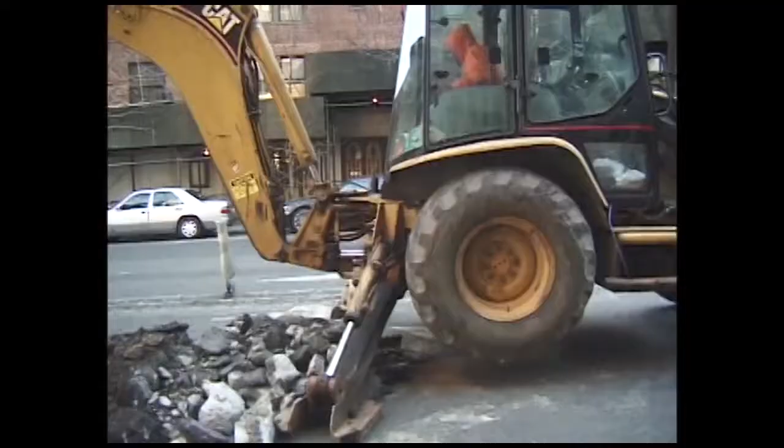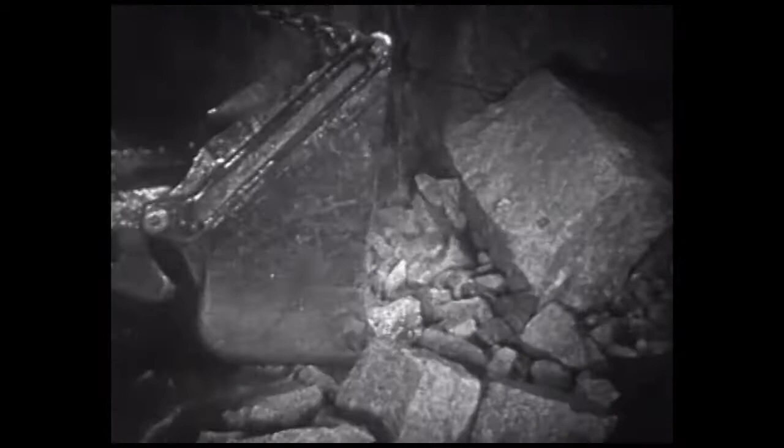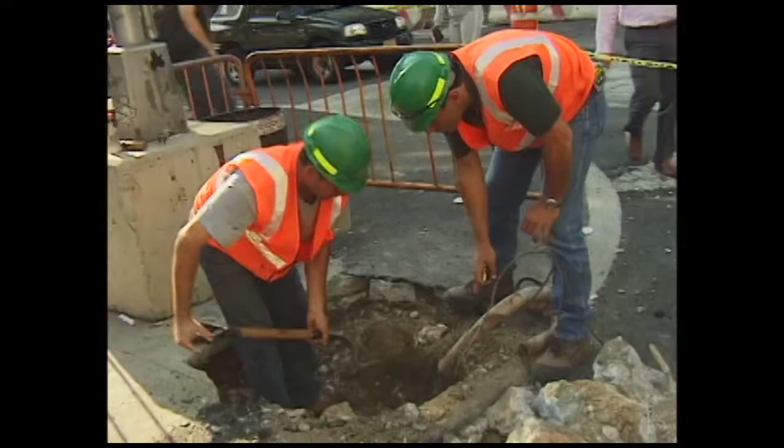And that's where the New York City Department of Design and Construction, or DDC, comes in. Ever since the first water main and sewer pipes were placed in the ground, there has been a need to maintain and fix them. Over the decades, various agencies have been installing and maintaining the city's infrastructure. In an effort to streamline the process and coordinate the work, the city took the construction arms of several agencies and placed them under one roof, so that the water main people could talk to the roadway people so that reconstruction could be coordinated. And so, in 1996, the city charter created the Department of Design and Construction.

DDC has two distinct groups: structures and infrastructure. The structures group builds or reconstructs the city's buildings, such as police precincts and libraries. And the infrastructure group is charged with reconstruction of the city's water mains, sewers, and roadways.

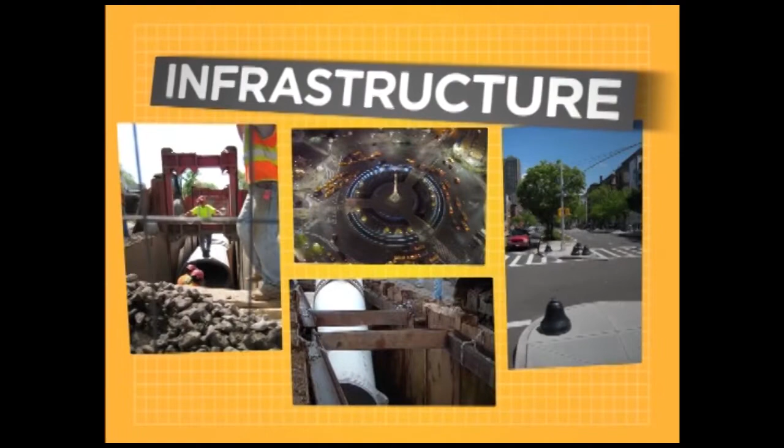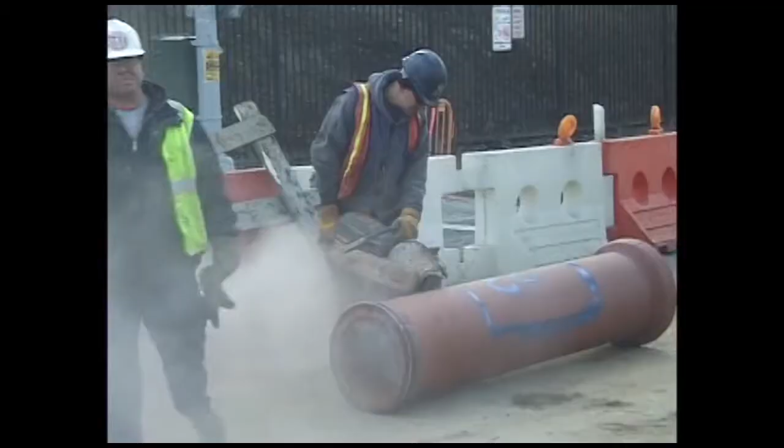Before DDC begins any infrastructure project, no matter how big or small, the project or work to be done must be identified or requested by either the Department of Transportation or Department of Environmental Protection, or both. Why these agencies? A major function of the DOT is to maintain the city's streets, sidewalks, traffic signals, and street lighting. DEP is charged with delivering clean drinking water to New York City and providing for the safe and sanitary collection of wastewater and sewage.

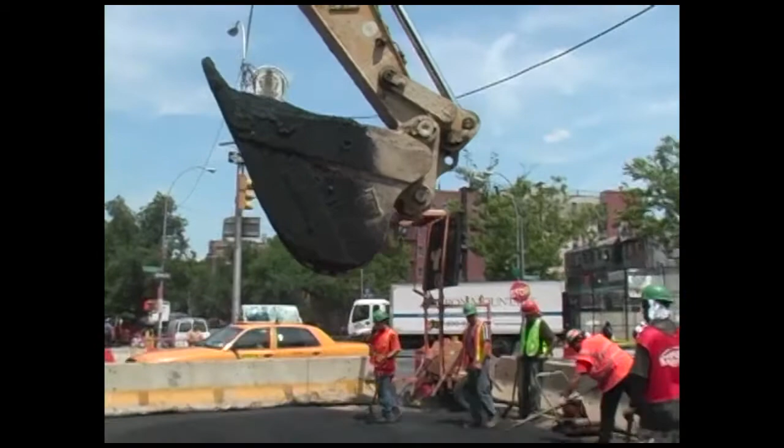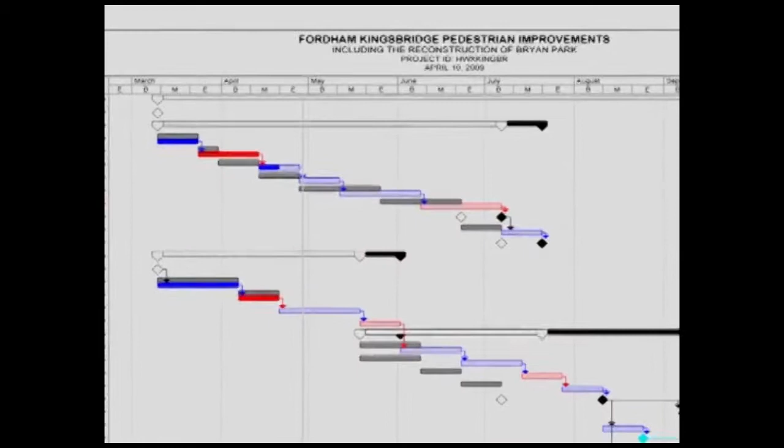Before construction can begin, there's a great deal of coordinated planning that must be done. Let's take a look at the steps DDC takes before a capital construction project begins. The first step is the design phase. Once the design is complete, the project is then put out to bid for contractors. Bids are awarded to the lowest responsible contractor. Then a work schedule is developed where we lay out which activities will be performed and in what order. Once that is completed, we can move on to the next phase.

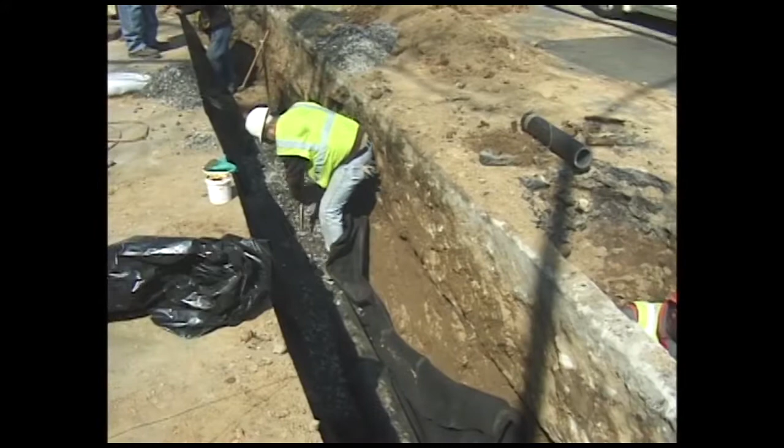Water mains and sewers are not the only facilities that run under the street and sidewalks. Private utilities are also there and are oftentimes directly over or adjacent to the water main or sewer. In these instances, these facilities must be moved or relocated so that DDC can have clear and direct access.

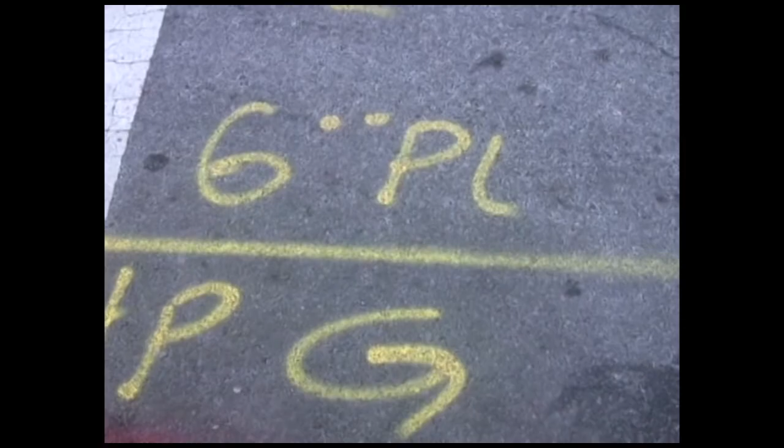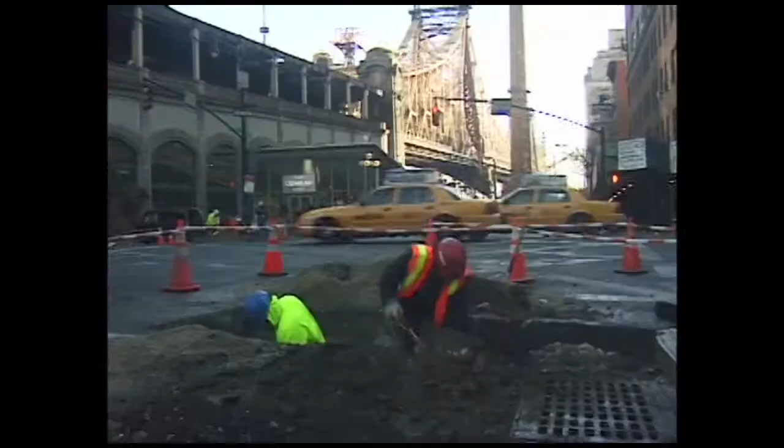The utility companies first come out to the street and mark out the locations of their facilities. These are the colored lines you see on the roadway, with each color representing a different utility. The utility companies have test pits dug, either in-house or by a private contractor, to locate their own utility's exact location before the project goes to construction. This is usually done during the design phase to see whether or not they need to relocate their facilities before construction begins.

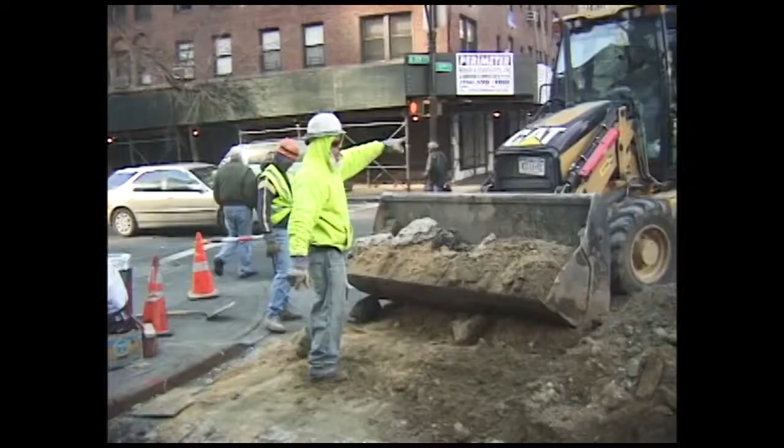The relocation of utilities is oftentimes a source of confusion for most people, as they see the utility companies come in, relocate their lines, and then a few months later DDC comes in and excavates the same area, leading people to think the work is not coordinated.

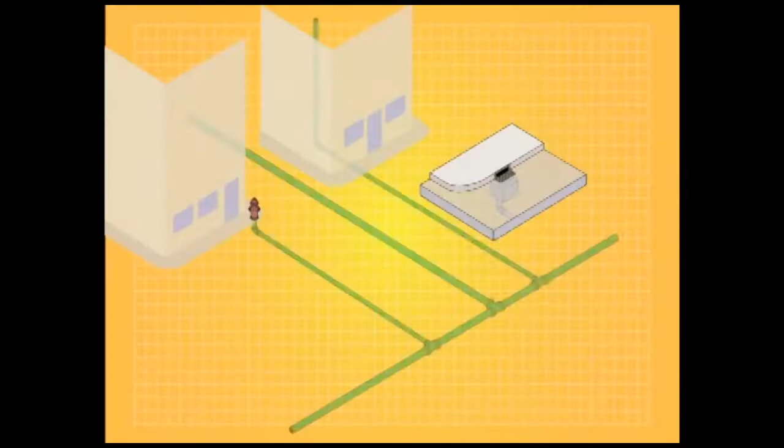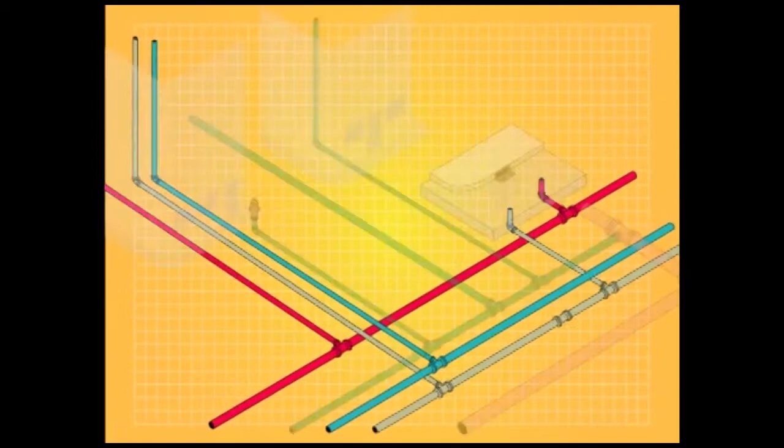Now we are finally ready to begin our work under the ground. Let's look at sewer main work. The sewer system is generally comprised of sanitary sewers, which carry sewage, and storm sewers, which capture runoff water from city streets. There are also combined sewers, which carry both. Since the sewage or water flows by gravity, the pipes must be angled accordingly.

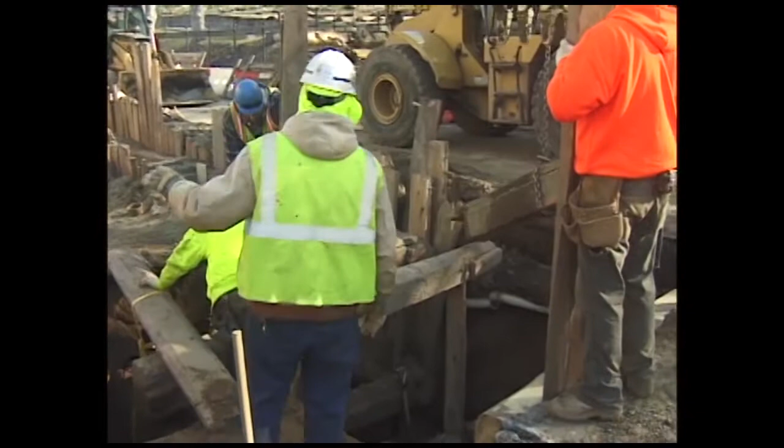Before the pipes can be replaced, sheeting or bracing must be installed within the excavated trench to keep it from collapsing on itself. During the installation of sheeting, utility services like gas and water may have to be temporarily interrupted while the utility pipes are moved around the sheeting material.

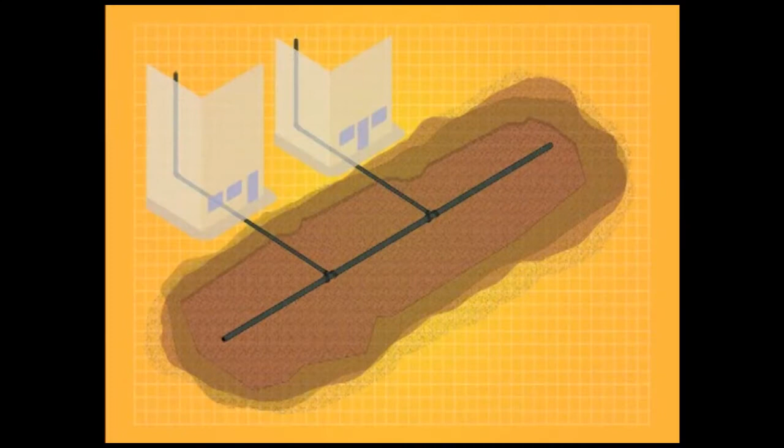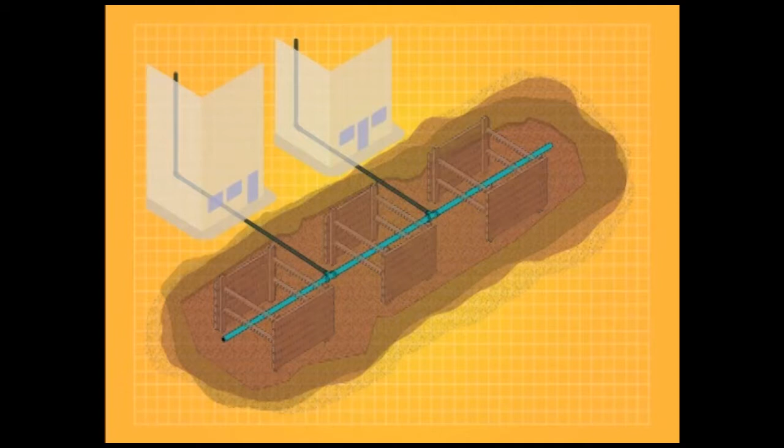Once the trench is excavated and sheeting is installed, the sewer pipe is replaced. At this time, new house connections are installed. Once the pipes are replaced, the trench is backfilled and work moves on.

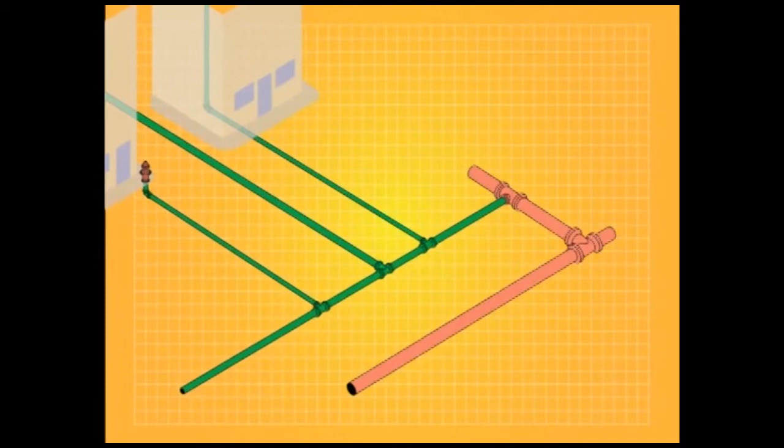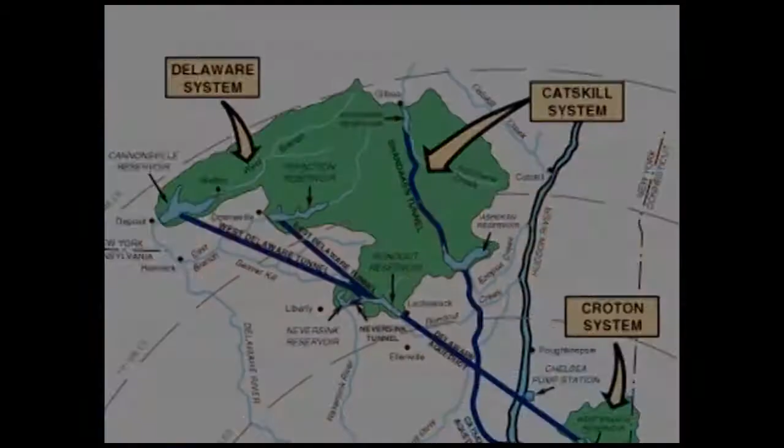Once the sewer work is completed, we turn to the water mains. But before we get to the actual work, let's take a look at how the millions of New Yorkers get their water. The city water comes from the reservoir upstate New York. It collects through various dam structures, and then it goes into a gigantic tunnel that conveys the water from upstate down to New York City.

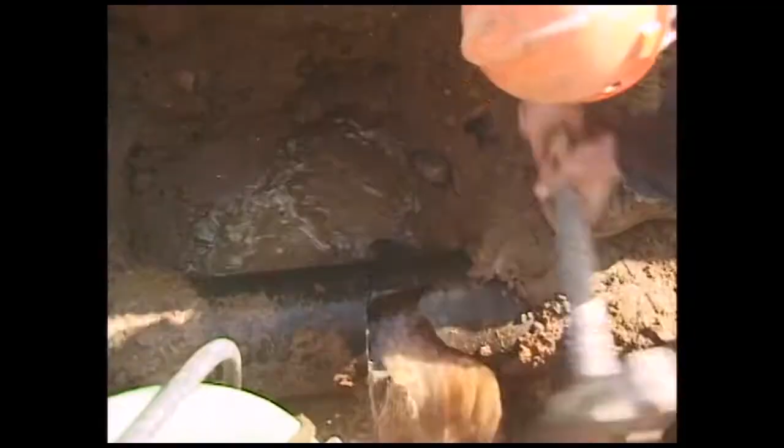When it gets down to New York City, it gets distributed through smaller pipes. As part of the project, we replace these pipes, because if one bursts, it's a disaster for everybody. In order to replace the pipe, you have to shut the main off. We replace the pipe, and then you turn the water back on. We do not shut people off for more than a day.

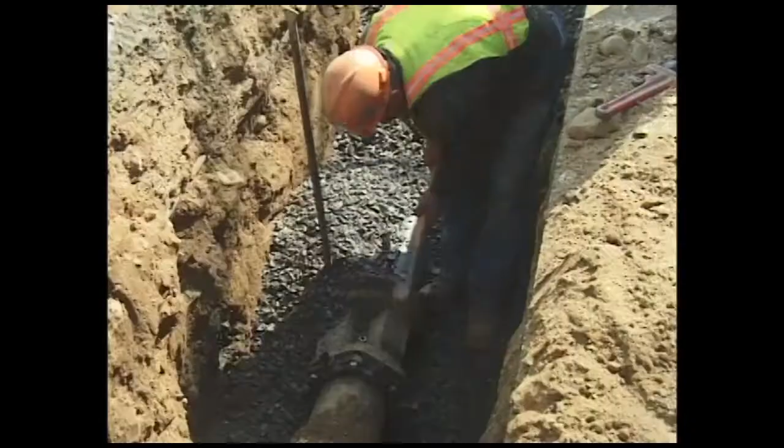We give notice in advance that the next day or so the water is going to be shut down. If you have special needs, we try to arrange some way to make sure you're okay with the shutdown. At the end of the workday, we reconnect that pipe back in. We flush it with chlorine and so forth to clean the pipe and make sure the sediment is cleaned up.

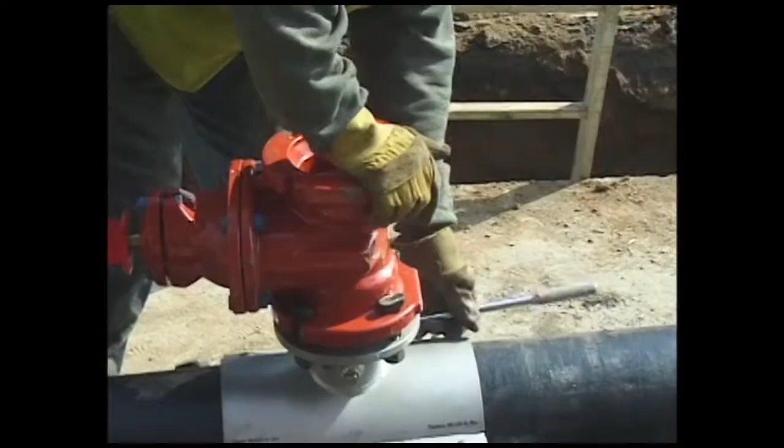Now let's look at how we actually replace an aging section of pipe and what that means to you. Simply put, a distribution main cannot be replaced without the water being turned off. Having your water service interrupted is a significant imposition, and DDC understands this and tries to accommodate certain users like medical facilities or residents who are on dialysis machines.

But in 99% of cases, a shutdown must be made before we remove the old and install the new. Water service is typically shut off for one day while the connection to your building is installed. The NYC DDC provides residents advance notice of the shutoff. The new water mains will last up to 50 years.

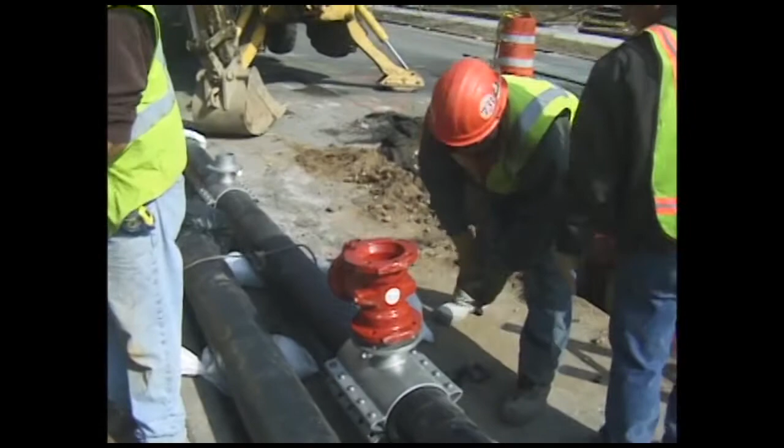New catch basins are installed and connected to the sewers. Now the below-surface work has been completed. The water mains, sewers, and catch basins have been installed. Now it's time to move above the ground.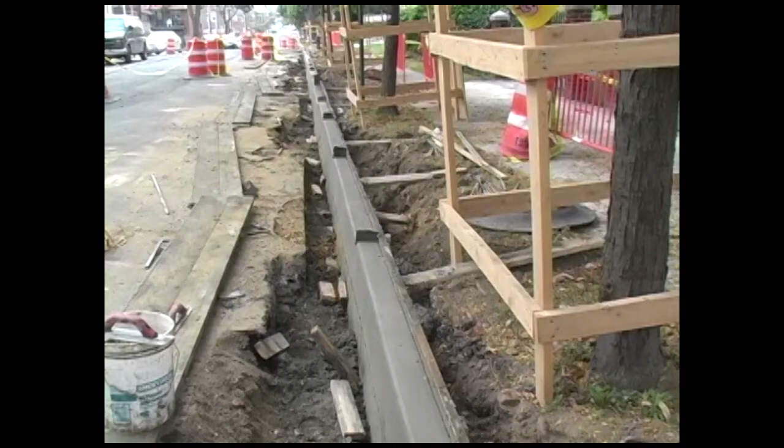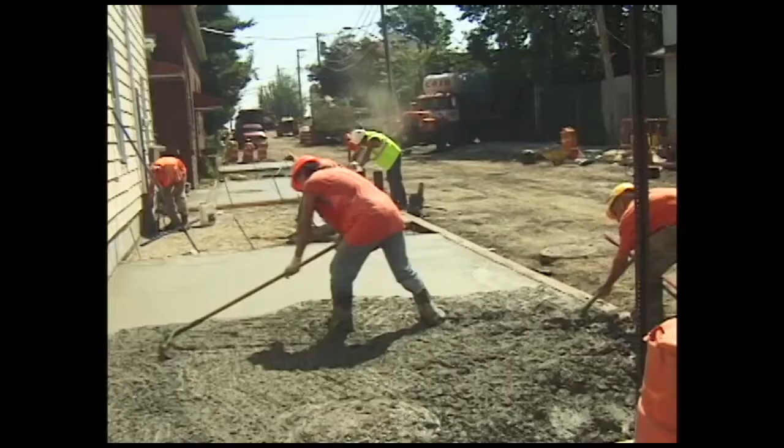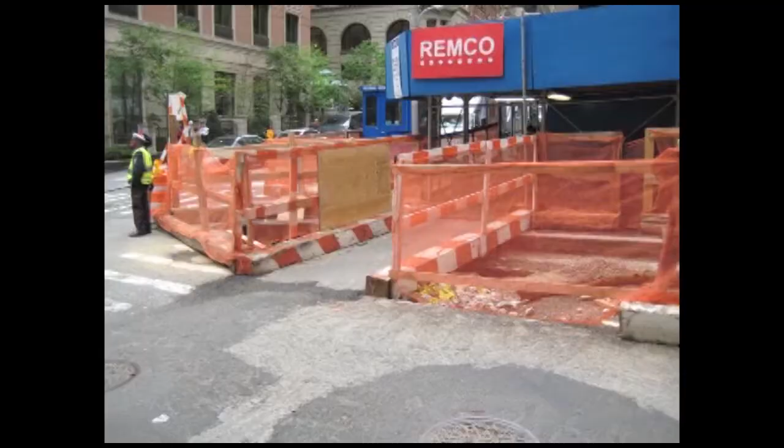Curbs are the first item to be installed as they set the grade for the sidewalk. Curbs are generally concrete, but can be steel-faced or granite depending on the location and neighborhood. Once the curbs have been installed, the contractor will excavate the old sidewalks and install the new ones. In some instances, the contractor will install half the sidewalk at a time so as to maintain building access, or they may place bridges over the new concrete while it cures and sets in place.

One of the most frequently asked questions from property owners is, do I have to pay for the new sidewalk? Only if there is an existing defect, such as a crack. Before any capital construction project begins, the Department of Transportation surveys the sidewalks within a project and sends the homeowner a sidewalk violation with a sketch of the sidewalk showing the areas or flags that contain defects. For more information on sidewalks, please visit the DOT at www.nyc.gov/DOT.

During the course of a capital investment project, the DDC understands that some topics are confusing for the public. Two such areas of confusion are encroachment and property acquisitions. Let's take a look at these two topics.

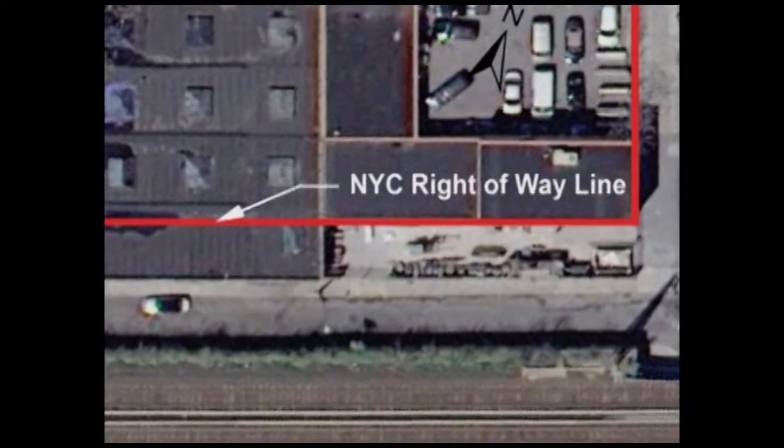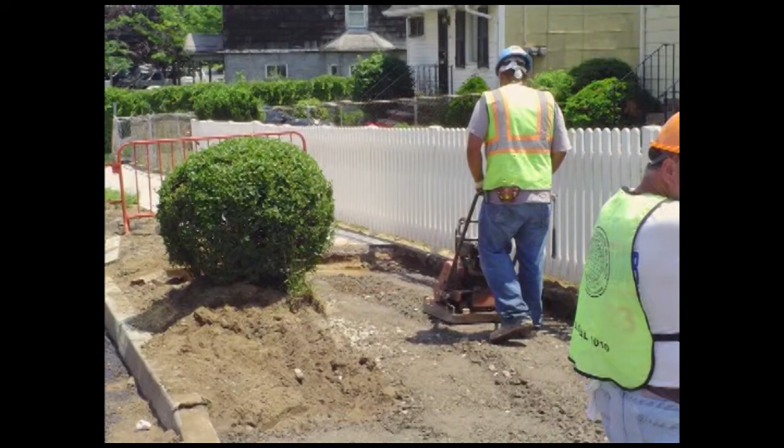There's a lot of misinformation on the topic of encroachment. Simply put, an encroachment is any structure, such as a fence or a mailbox, for example, that extends out beyond the boundary of private property onto city property. In upgrading the city's infrastructure, encroachments may need to be moved back onto the private property, or completely removed, for a variety of reasons, such as the construction of new sidewalks or widening the roadway.

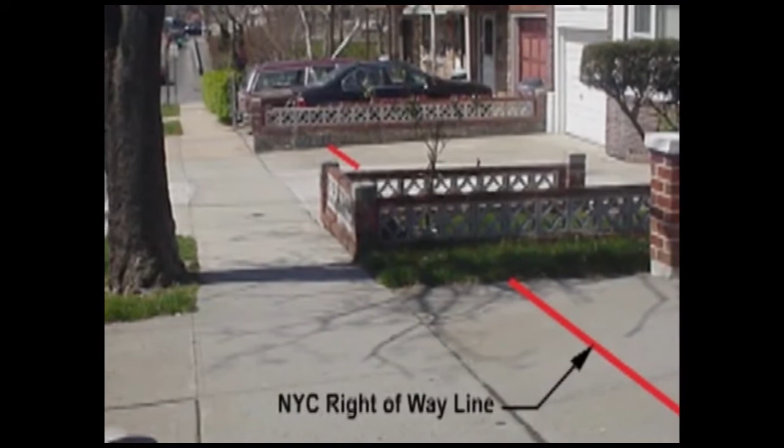DDC works with the homeowner to make the transition as smooth as possible, and homeowners have the opportunity to remove any private structures before construction starts.

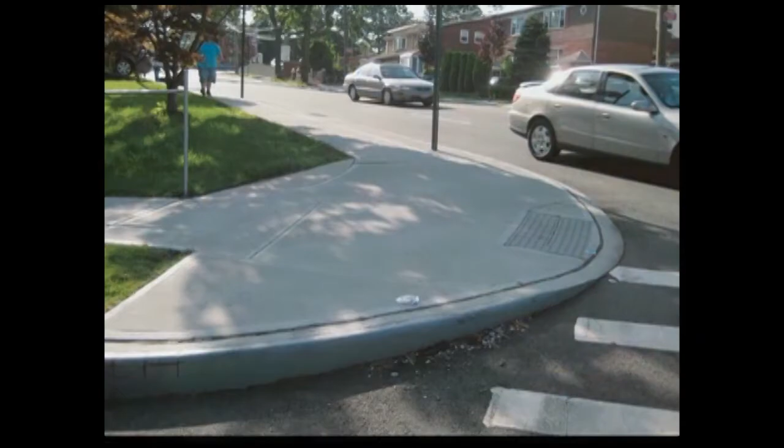Every so often, a design calls for widening the roadway or adding new or wider sidewalks. If no city-owned land is available, the city will need to acquire the land from the adjacent property owner for public use. This process of private property appropriation is typically done pursuant to the New York State Eminent Domain Procedure Law, and the homeowner typically receives fair market value for the property.

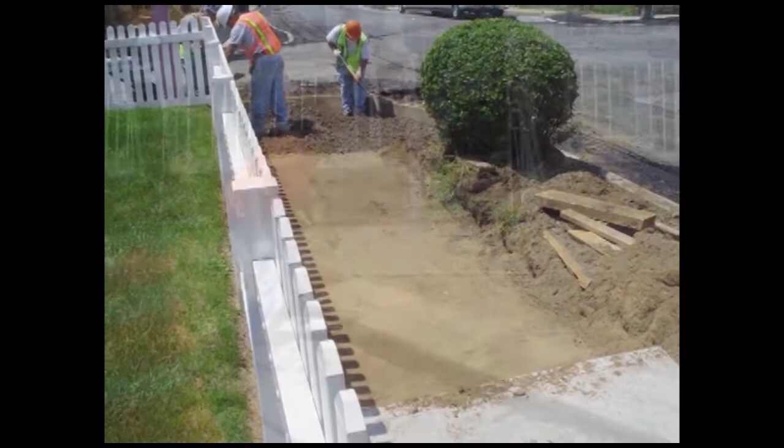In some cases, the city may instead obtain an easement through negotiation with the property owner. This is more typical when a DEP structure is being installed underground, but the city does not need to use the above-ground space for public access.

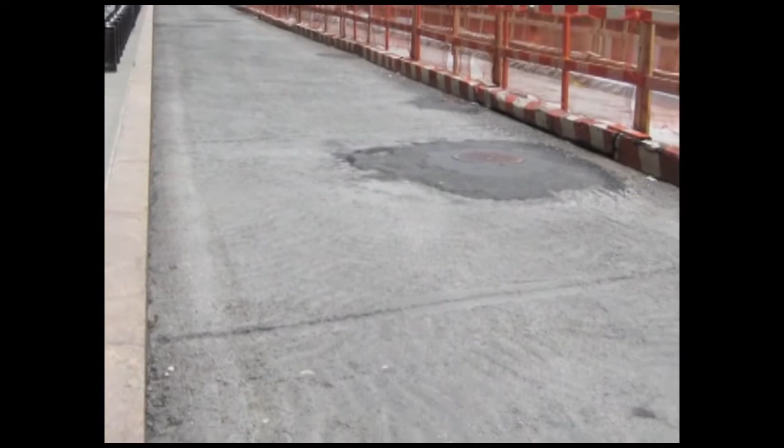The final stage of the capital construction project is typically the roadway. The roadway consists of a concrete base which is covered with a coarse layer of asphalt, called the binder, and then a final, less coarse layer of asphalt.

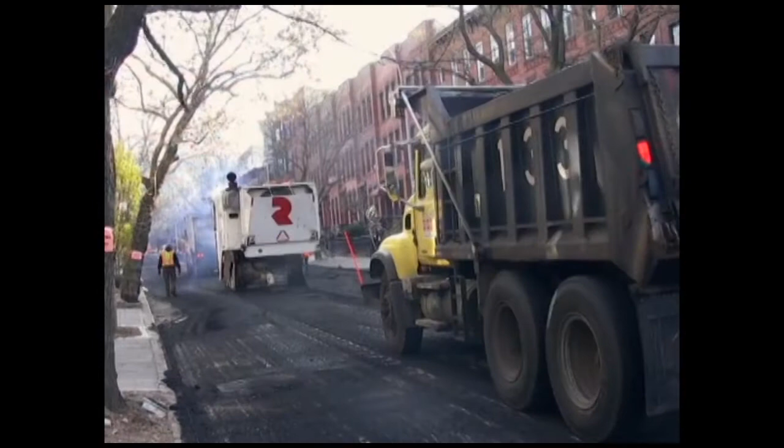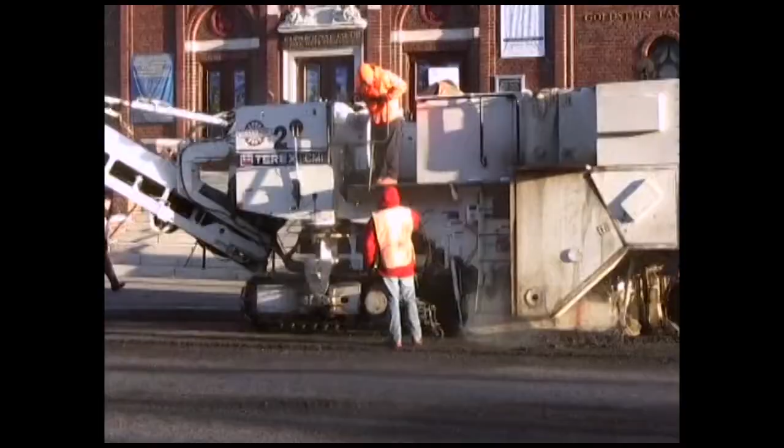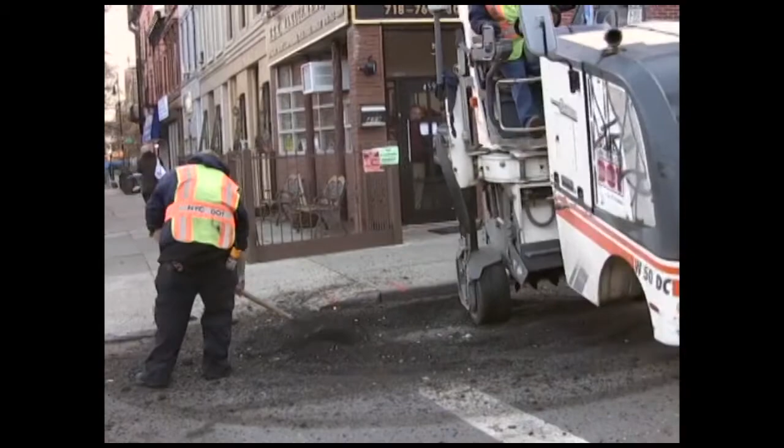In some instances, the city just replaces the asphalt layers. These are called milling paving projects and are performed throughout the city on a cyclical basis in order to maintain a smooth riding surface on city streets. A milling paving project is a very simple process that involves removing the worn asphalt surface of the roadway and placing two new layers of asphalt, the paving part. This work is typically completed in a few weeks. The paving operation is usually done in one day.

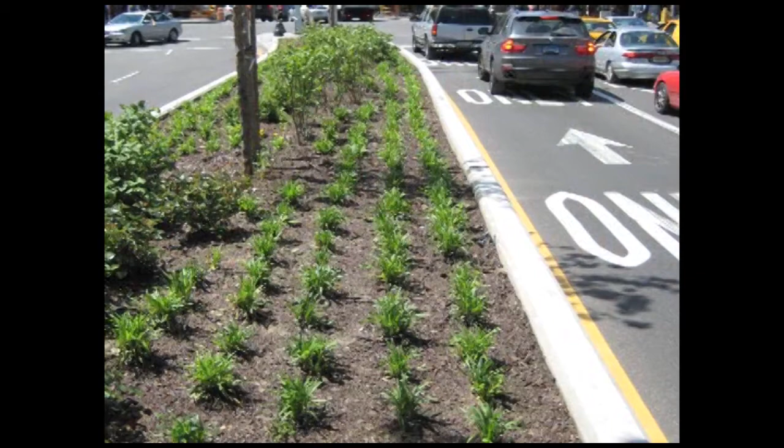The final stages of a project can also include landscaping, adding streetlights and traffic lights. In an effort to enhance the cityscape, DDC, in partnership with the Department of Parks, will plant trees and shrubs and grass in certain locations. Streetlights are installed once the electrical conduits from the street are completed. The streetlights may be the normal ones that existed before, but in certain cases, such as historic or business improvement districts, specially designed or historic-style streetlights are installed.

In 1982, Mayor Koch signed into local law that 1% of the budget of a capital project will go toward integrating public art into that project.

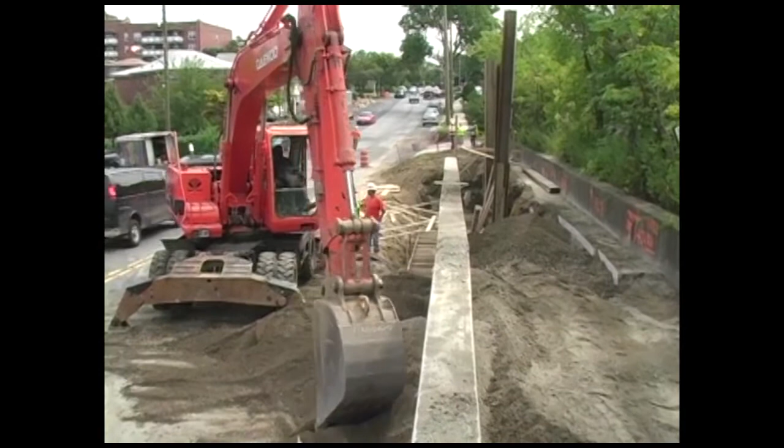DDC is well aware of the impact its work and projects have on the community and is committed to ensuring that you, the community, know what is happening and when it will be happening. For high-impact projects, DDC will typically assign a Community Construction Liaison, or CCL. The CCL is a dedicated on-site person whose primary job is to provide advance notification of work activities and related impacts to the community. With this information, people can plan their lives and daily routines with a minimum of disruption.

The CCL is the first point of contact for the community. Their job is to provide advance notification to the community and identify and help resolve project-related issues. Basically, they are DDC's on-site problem solvers and help mitigate the impacts of construction.